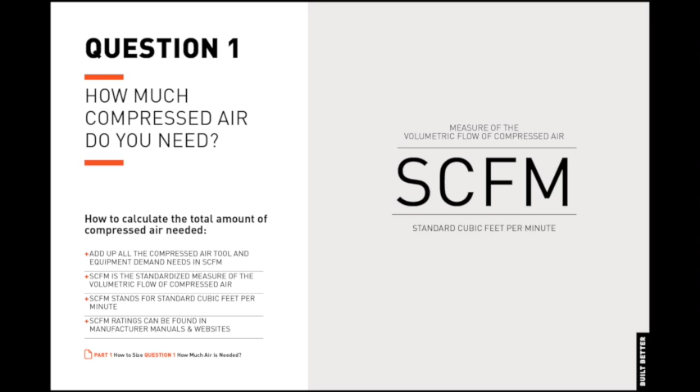Let's highlight a common mistake here. Just because a pneumatic tool specifies that it uses, for example, 40 SCFM of compressed air doesn't necessarily mean that it uses 40 SCFM all of the time. Most of the compressed air tools and equipment in a shop are not in use all of the time, all day long. This is where the concept of use factor comes into play.

The amount of time a pneumatic tool or equipment is actually used versus the time that it is not. There are pneumatic tools that are used some of the time, intermittently, and there are pneumatic tools that are used for longer periods of time or continuously.

Again, this exercise isn't an exact science and there isn't one perfect answer, but a useful technique that simplifies the process of determining your compressed air requirements for a given application is to identify all of the uses of compressed air and then group them into either intermittent use or continuous use.

For example, it's safe to assume that one mechanic uses only one tool at a time and generally does not pull the trigger all day long. A half-inch impact wrench for changing tires would probably be used intermittently and used for only some of the time during the day. This tool would be grouped as intermittent use.

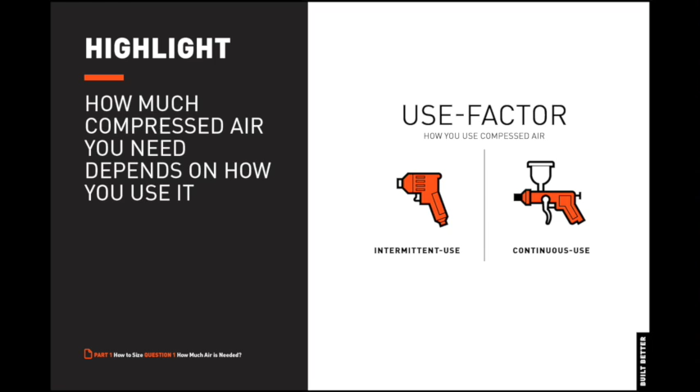Other than general mechanic work, there are some activities that are particularly heavy users of compressed air, such as sandblasting, grinding, and other auto body shop activities such as spray painting. These activities use pneumatic tools that consume a lot more compressed air and are also used for longer periods of time or continuously. These types of tools would be grouped in the continuous use category.

Let's look at some examples to help us begin to understand how to estimate a shop's compressed air demand, as well as illustrate the differences between intermittent use and continuous use. After this brief exercise, we will also provide a general rule of thumb that will help you estimate an average auto repair shop's compressed air demand if you are lacking detailed information.

Our first example is a general auto repair shop with 2 bays as well as 3 technicians. Let's assume that there are 2 auto lifts, a tire changer, and a buffer, as well as 2 impact guns that could be used simultaneously. All of these compressed air tools are typically used only some of the time during the day and relatively short periods of time. They can be categorized as intermittent use.

Using some intuition, we'll estimate an average use factor of 15%. You can think of this as either the tools being used 15% of the time during the day, or for 9 minutes of every hour, or for 9 seconds out of every minute.

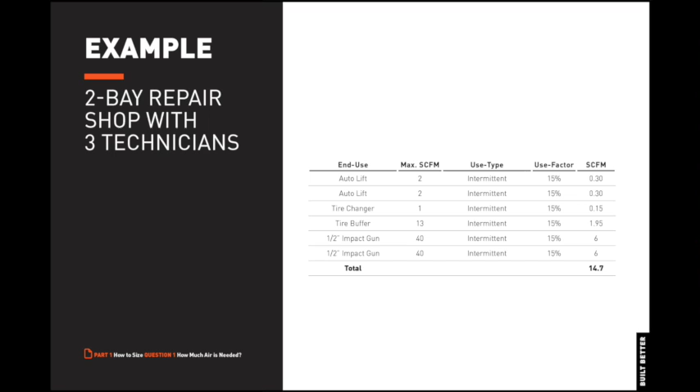Adding all these tools and equipment together, taking into consideration their use factor or the proportion of time the tool is on versus off, results in an average compressed air demand of approximately 15 SCFM. So the half-inch impact wrench that we first mentioned when talking about use factor, which consumes 40 SCFM at its peak use, actually consumes only 6 SCFM based on a 15% use factor.

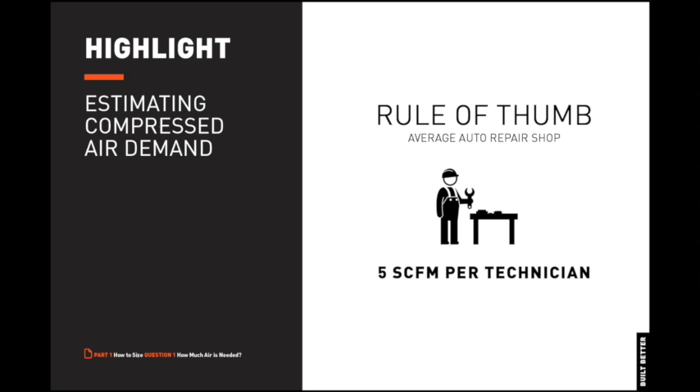A rule of thumb may also be used to provide a rough estimate of the compressed air requirements if these details aren't available. In a typical auto repair shop, each technician usually uses around 5 SCFM. So if there are 2 bays with 3 technicians working at the same time, a rough estimate of the total compressed air consumption would be around 15 SCFM.

Let's look at another example. A typical collision repair facility may have the following pneumatic tools and equipment: a spray paint booth, an HVLP spray paint gun, a prep station with a sander and grinder, as well as a paint mixing room. The sander, grinder, and spray paint gun are generally used for extended periods of time and consume a considerable amount of compressed air. They are categorized as continuous use.

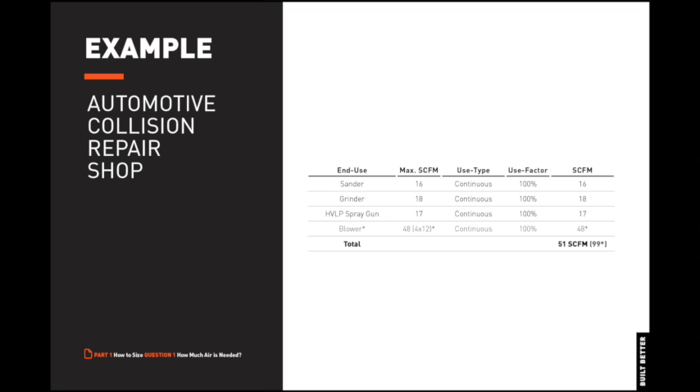Adding all these tools and equipment together, taking into consideration their use factor, results in an average compressed air demand of approximately 51 SCFM, or 99 SCFM if the air compressor is supplying compressed air for the blowers in the spray paint booth. Now that we've estimated how much compressed air is needed, we need to know what pressure is needed.

Pressure is measured in PSI, or pounds per square inch. Working pressure is the pressure to which your air system is set. Working pressure is determined by the specifications of the compressed air equipment and tools used. Different types of equipment and tools typically demand different operating pressures.

Normally, the tool or equipment with the highest operating pressure determines the needed working pressure for the entire system, and other equipment and tools are fitted with pressure-reducing valves or regulators at the point of use. So take a look at the specs for the various compressed air tools and equipment you have, and whichever has the highest operating pressure basically sets the pressure required for the entire system.

We also have to account for pressure losses, or pressure drops that occur in the system. Pressure drop is a reduction in air pressure from the air compressor discharge to the actual point of use. It represents the energy lost as the air travels from the compressor to the point of use.

Each additional component in a compressed air system, such as air piping, air dryers, and air filters, contributes to pressure drop. Pressure drop could range from 5 psi for a good large diameter aluminum air pipe system to 20 to 30 psi, or even worse, for a poor small diameter iron air pipe system.

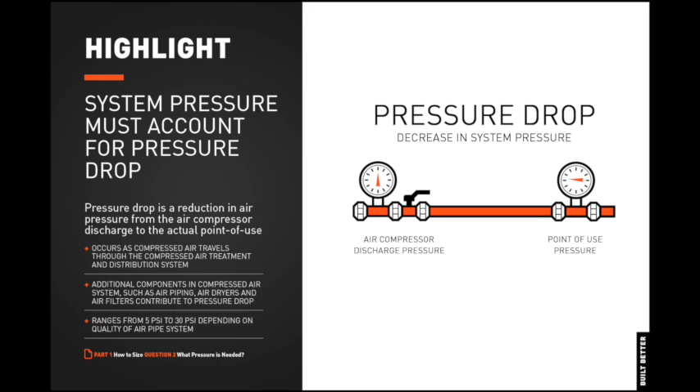For example, if the highest operating pressure of all the tools in your shop is 90 psi and you are using an existing air pipe system with an average pressure drop rating, then your minimum system pressure might be 110 to 120 psi. Let's highlight another common and unfortunately costly mistake.

Contrary to popular practice, you don't really want to run your compressed air lines at a higher pressure than what is really needed. Compressing air takes a considerable amount of energy, and the higher the pressure, the more energy is used, the more heat the air compressor generates, and the more wear and tear the air compressor bears. So it's important to keep your working pressure as low as possible.

Here's another helpful hint. Make sure you have a good air pipe system that can reduce pressure losses and take a lot of the unnecessary work off of your air compressor. What's a good air pipe system? One that has a large diameter air pipe. The larger the diameter of air pipe, the better.

How the air pipe system is designed is equally important. A full loop system around the shop versus a single line that dead ends makes a big difference, giving you potentially twice the air capacity.

Invest in good quality quick connects that have a large opening and good large diameter air hoses. This is where a little extra money spent will make a huge difference.

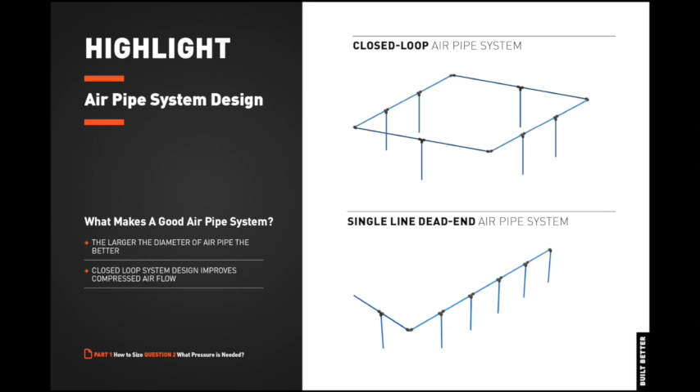Now let's look at the third and final question to help us properly size an air compressor. What kind of electrical power do you have available on site? An air compressor is typically the biggest energy consumer in your shop and usually contributes the most to your electricity bill. The size of air compressor that you can get is often limited by the type and amount of electrical power that you have available on site.

The first thing you need to do is determine whether you have three-phase power or single-phase power available to you, what the maximum electrical service available to you is in terms of amps, and also what voltage is available on site. All of this information should be verified by a certified electrician.

You don't want to make a mistake here. A lack of accuracy could be very costly. This highlights another common mistake. It's extremely important that the air compressor matches the electrical service that is available on site.

Let's illustrate the importance of this with an example. If you only have single-phase power available on site, you will typically be limited to a 5 to 7.5 horsepower air compressor, or in the case of our revolutionary Huron V10 rotary screw air compressor, a 10 horsepower air compressor.

To give you an understanding of the electrical power that is required, a standard air compressor will draw a current approximately 7 times its full load amps on startup. This means that when the air compressor first starts up, it requires 7 times the electrical current it takes to run normally. For example, a 5 horsepower air compressor on single phase will need more than 100 amps of current available when it starts up.

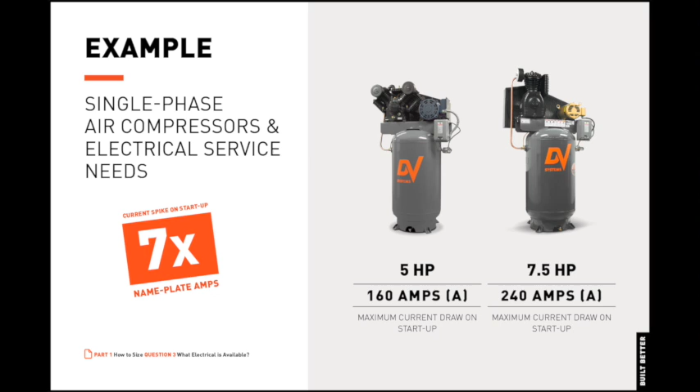In the case of the Huron B10 rotary screw air system, however, its variable speed direct drive starts the motor gradually with an extremely low maximum 55 amp draw, eliminating current spikes on startup, allowing installation of a 10 horsepower air compressor in locations where it was previously uneconomical or even impossible to install.

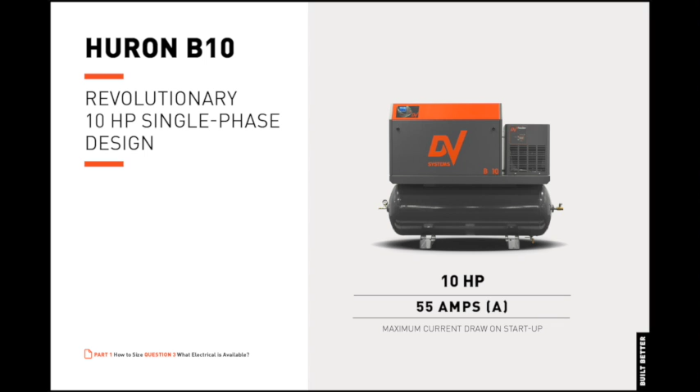So now we've covered the 3 critical questions that give us an understanding of what size of air compressor is required. How much air do you need? What pressure is required? What electrical is available? This gives us a good understanding of the approximate compressed air delivery required in SCFM, the size of the air compressor in horsepower, the required system pressure in PSI, and the necessary electrical service needed to meet these demands for your application.

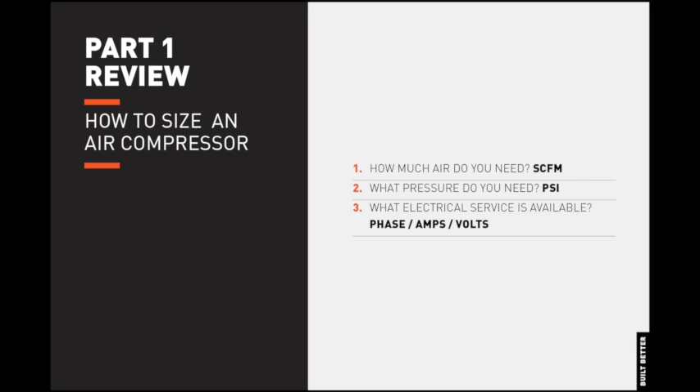Now that we know the approximate size of air compressor required, how do we select an appropriate type of air compressor? How do we decide between a reciprocating air compressor and a rotary screw air compressor? Once again, this isn't an exact science and the answer isn't black and white, but a few helpful questions will point us in the right direction.

What do you use your compressed air for? How quiet do you need your air compressor? And how clean do you need your air? Answering these questions will give us a good idea about whether a rotary screw or reciprocating air compressor is appropriate for your particular application's needs. Let's begin with our first question.

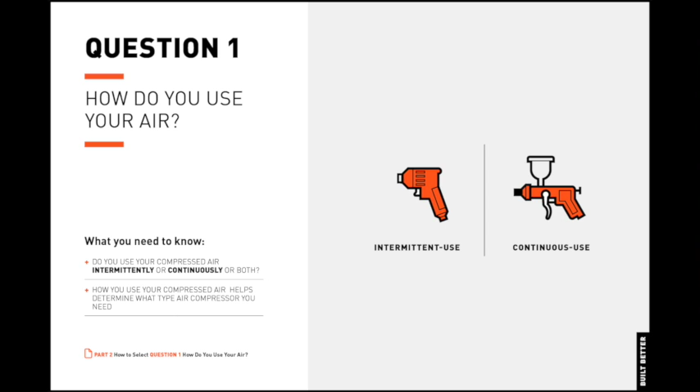What do you use your compressed air for, or how do you use it in a typical day? Understanding how you use your compressed air, either intermittently, continuously, or both, is necessary in approximating how much compressed air delivery you need in your shop. How you use your compressed air throughout the day will also help determine what type of air compressor is best suited for your particular application.

Just like compressed air tools and their activities have use factors, the proportion of time a tool is used versus the time it isn't, air compressors have duty cycles, the proportion of time the air compressor can operate without the risk of overheating and sustaining excessive wear versus the time it needs to stop and cool down before it resumes again. This highlights another important point to remember.

Selecting an air compressor with a duty cycle rating appropriate for your compressed air usage is critical. Different types of air compressors have different duty cycles.

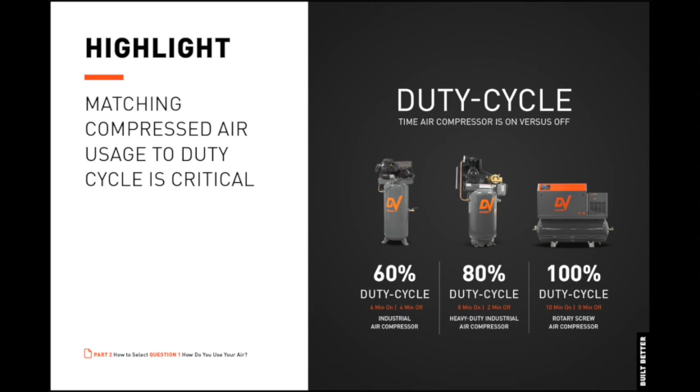Rotary screw air compressors have a 100% duty cycle and can run continuously 24/7, while pressure lubricated heavy-duty industrial piston air compressors have approximately an 80% maximum duty cycle, needing to cycle off 20% of the time, and splash lubricated industrial air compressors have approximately a 60% average duty cycle, needing to cycle off 40% of the time. Keep in mind these ratings refer to an 8-hour day.

Let's see what this means in terms of sizing and selecting an appropriate type of air compressor using our previous example of the auto repair shop with 2 bays and 3 technicians. The compressed air demand was estimated to be 15 SCFM. For illustrative purposes, let's assume that 15 SCFM is the absolute maximum compressed air demand ever needed by this repair shop. It's an unlikely circumstance in real life, but suitable for our purposes of explanation.

We're going to show you a simple calculation that will let you know how to size air compressors with different duty cycles to a given compressed air demand need, in this case 15 SCFM. For rotary screw air compressors, which have a 100% maximum duty cycle, we divide 15 SCFM by 1.0, which represents 100% duty cycle in decimal format. This results in 15 SCFM, meaning we need a rotary screw air compressor that can deliver at least this amount of compressed air at a maximum 100% duty cycle.

The Apache A5 rotary screw air compressor delivers 16 SCFM of compressed air and would meet the 15 SCFM demand while running at a 94% duty cycle. Alternatively, a B5 rotary screw air compressor, which delivers 18 SCFM of compressed air, would meet the demand while running at an 83% duty cycle.

How do we know that the Apache can service the demand while running at a 94% duty cycle and a B5 can service this demand while running at an 83% duty cycle? Simply divide the compressed air demand of 15 SCFM by the Apache or B5's maximum SCFM output, in this case 16 and 18 respectively. So 15 divided by 16 equals 0.94 or 94%, and 15 divided by 18 equals 0.83 or 83%.

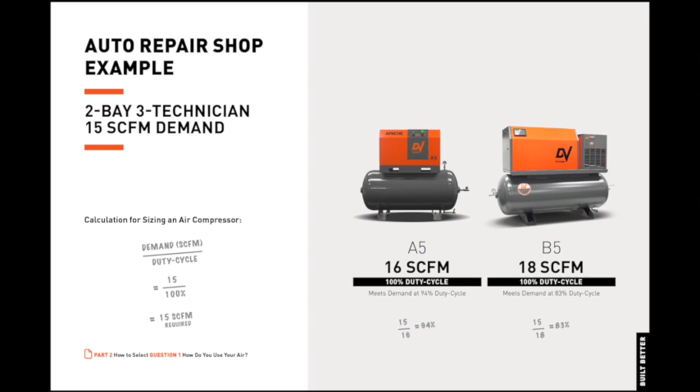In terms of pressure lubricated heavy-duty industrial series reciprocating air compressors with a maximum duty cycle of 80%, we divide the 15 SCFM compressed air requirement by 0.80, which represents 80% in decimal form. This results in 18.75 SCFM, meaning we would need a heavy-duty industrial air compressor that generates at least 18.75 SCFM. Our 5-horsepower heavy-duty industrial series delivers 19.1 SCFM at a maximum 80% duty cycle.

In terms of splash lubricated industrial series reciprocating air compressors with an average maximum 60% duty cycle, we divide the 15 SCFM compressed air requirement by 0.60, which represents 60% in decimal form. This results in approximately 25 SCFM, meaning we would need a splash lubricated industrial air compressor that generates at least 25 SCFM. Our 10 HP industrial series delivers 31 SCFM.

In very general terms, if your compressed air uses are intermittent like the previous 2-bay 3-technician auto repair shop example, you can most likely use either a reciprocating or rotary screw air compressor. But as you can see, the sizes of these air compressors will vary in terms of horsepower depending on whether you choose a rotary screw, heavy-duty industrial, or industrial line.

If your compressed air uses are primarily continuous use, like the auto body shop example, a rotary screw air compressor is most likely recommended, rather than oversizing piston air compressors to meet the demand. How you answer the remaining questions will ultimately help you decide between a reciprocating or rotary screw air compressor.

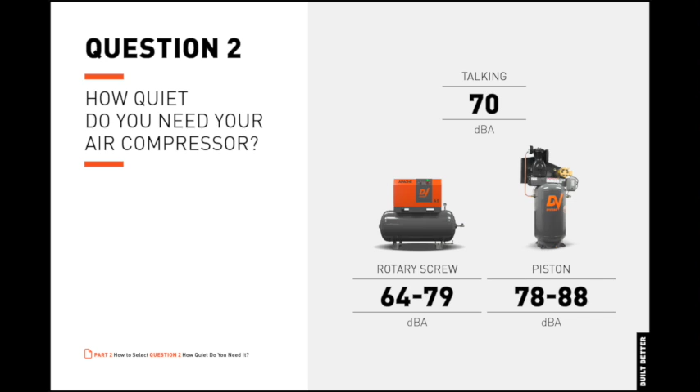The final question to ask is, how clean do you need your compressed air? For some applications, such as auto body spray painting and refinishing, there is no choice. You absolutely need clean, cool, dry compressed air. The end product is directly affected by the quality of compressed air provided, and the cost of refinishing is far too high to risk being contaminated with dirt, oil, or water.

For this type of work, you absolutely need to include good quality compressed air filters and an air dryer with your air compressor. DV Systems DF Series compressed air filters remove oil and other contaminants found in air, and DV Systems Pro Dry refrigerated air dryers remove moisture to provide clean, cool, dry air for sensitive applications where compressed air quality is essential, such as auto body shops.

Generally speaking, the compressed air filters and air dryer are sized to match the air compressor, but many of our rotary screw air compressors are available in complete air system packages, ready to plug and play, making it an easy solution. For other activities, such as general auto repair shop compressed air tools, you have a choice.

You can run the equipment on dirty, wet air and deal with the wear and tear of the tools and equipment, or you can invest in compressed air filters and an air dryer and greatly improve the performance and life of your compressed air tools and equipment.

In the previous auto body shop example with a demand of 51 SCFM, the compressed air is predominantly used for continuous use activities such as sandblasting, grinding, and spray painting, which certainly demands clean, cool, dry compressed air.

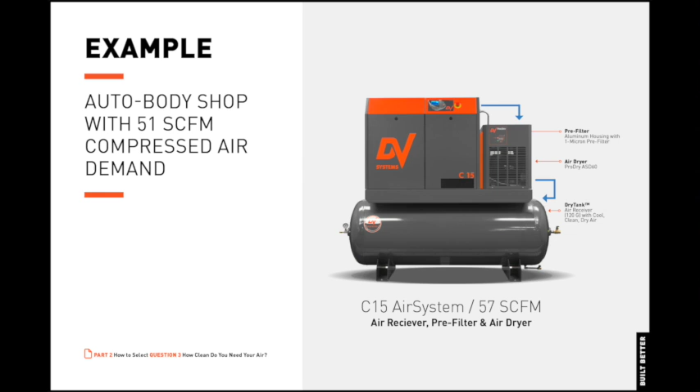So let's review the questions that need to be asked in order to properly size and select an air compressor for your auto repair or auto body shop. In order to size an air compressor, ask the following questions.

How much compressed air do you need in terms of SCFM? What pressure do you need in terms of PSI? What kind of electrical power do you have available on site in terms of phase, volts, and amps?

In order to help you select an appropriate air compressor, ask the following questions. What do you use your compressed air for? Do you use it intermittently, continuously, or both? How quiet do you need your air compressor? And how clean do you need your compressed air?

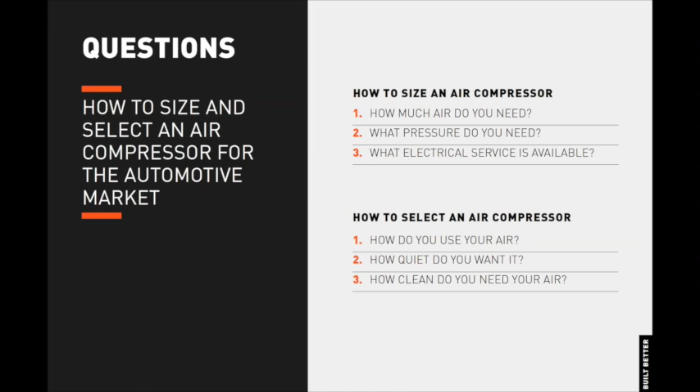Before we move on to the Q&A session, remember that we have provided a very general overview of the process of how to size and select an air compressor. This simplified take is meant to give you an introductory understanding of the process of choosing an air compressor.

In order to adequately size and select an air compressor for your auto repair or auto body shop application, it is recommended that you get in touch with an official DV Systems Sales and Service Center for a comprehensive assessment. And that concludes our webinar on how to size and select an air compressor for the automotive market.